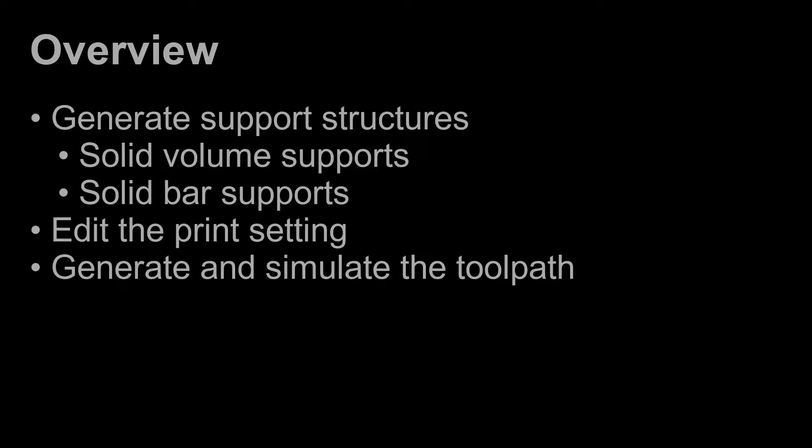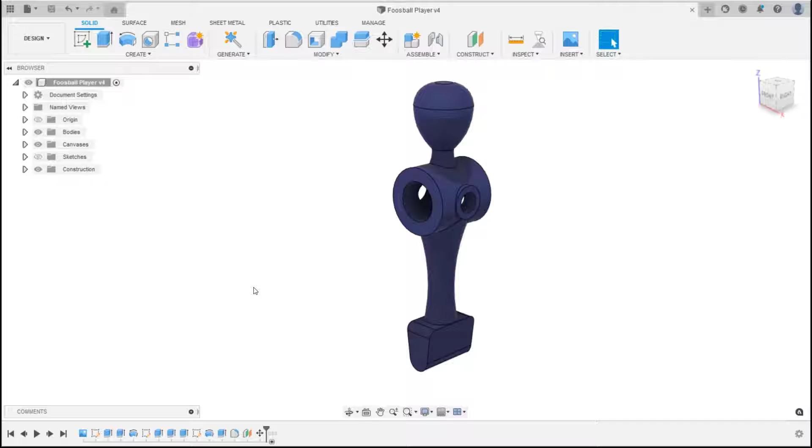Hi there, and welcome to this video on how to use the volume and bar support for print preparation for fused filament fabrication in Fusion 360. In most slicers, the support structure is generated on slicing, and the user has little control on the placement and structure itself. Fusion 360's workflow offers users more freedom in both support placement and support structure. In this example, supports will be generated for this foosball player.

Having created a setup, selected a printer and print setting, the next step is to generate support. Navigate to the Supports group in the toolbar. Here, there are two support options, solid volume and solid bar support. Solid volume support is best for supporting large overhanging areas, whereas solid bar support is ideal for bodies with small specific overhanging areas. Select the solid volume support, and this opens the volume support dialog.

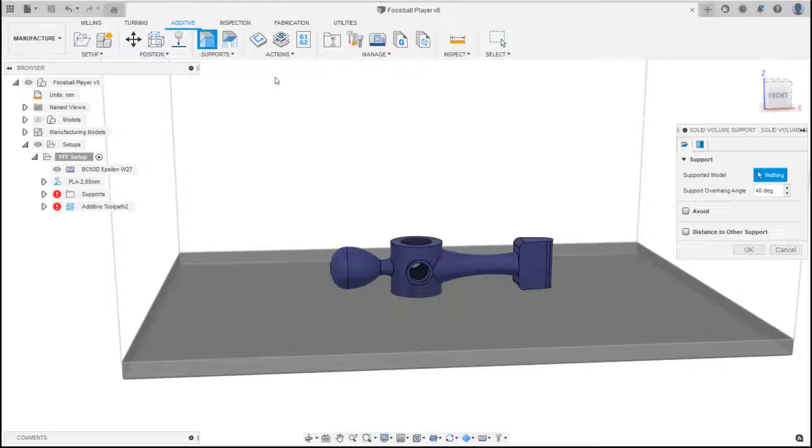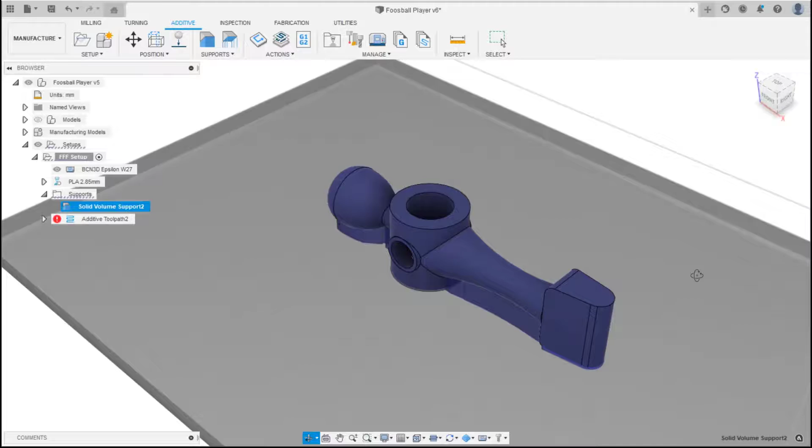Here, select the individual faces that require support. Alternatively, the whole model can be selected and supports will be generated for the faces whose areas fall below the angle defined by the overhang angle. Clicking OK will create a preview of that support structure. This looks good, but those horizontal holes will also need to be supported.

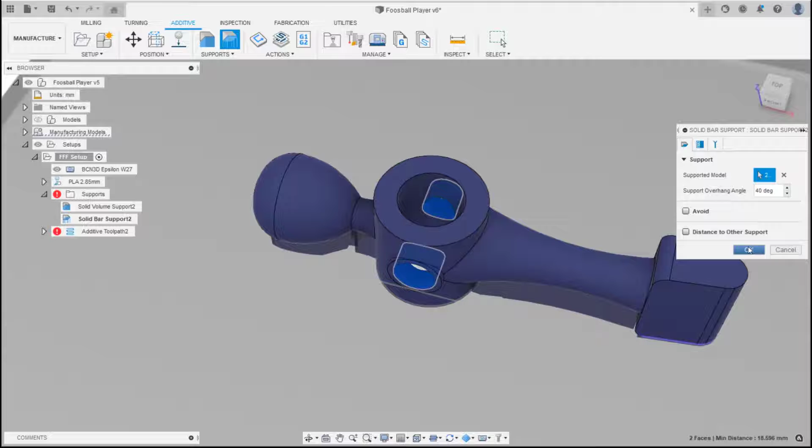For these features, navigate back to the Supports toolbar group and select Solid Bar Support. This opens the bar support dialog, and from here select those horizontal holes. Leave the rest of the settings as default and click OK. The bars have been generated. Make sure to notice how the bars generate at an angle down from the feature onto the print bed to avoid the body. Great, now the part is fully supported.

The final stage is to check the print settings. Right click on the print setting in the setup and click Edit. The Print Setting Editor dialog will open. Navigate to the Support tab of the Strong Body preset. Note, these support settings have been optimized for the volume support, so a few edits will be needed to accommodate the bar supports in the print.

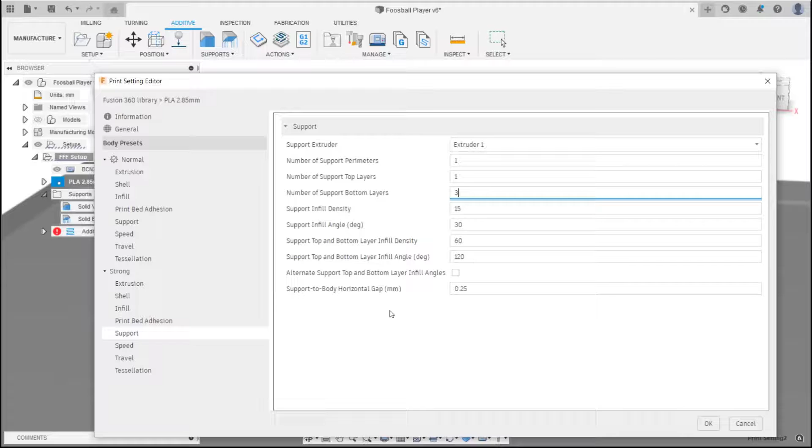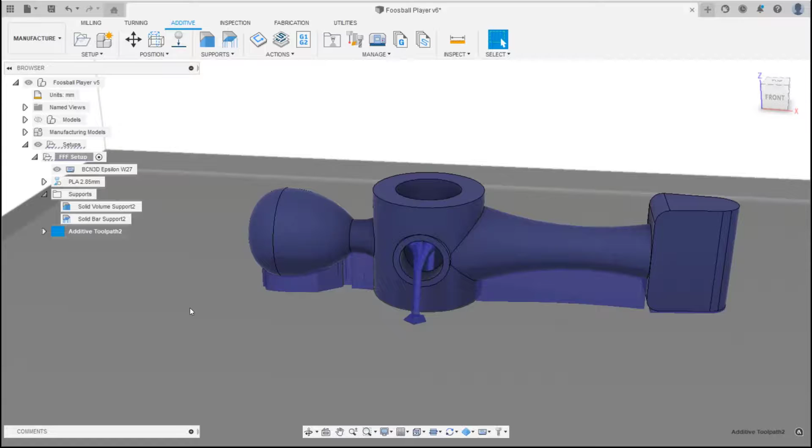Here, set the number of support perimeters to 1 and the number of support bottom layers to 3. Finally, right-click on the Strong Body preset and make this the default. This will mean any bodies on the print bed will use the Strong Body preset. Click OK. Generate the toolpath, and then simulate. Using the drag arrow, check both the body and support toolpaths. And, once happy, select Post-Process to generate the print file.